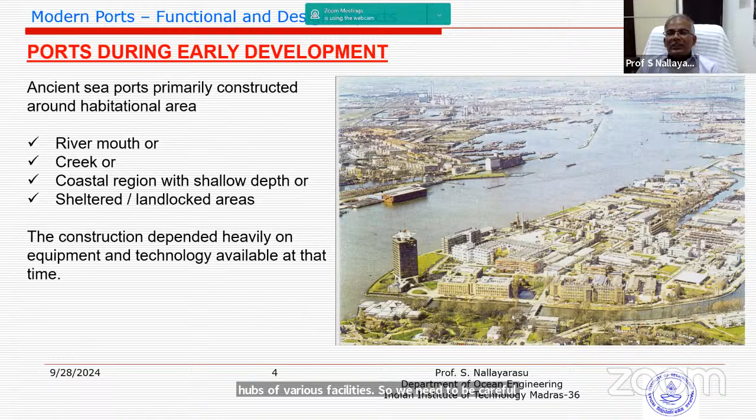Typically, if you see this picture from an old textbook, even now after hundreds of years, the British constructed ports or berthing facilities made of various materials. Even today we can see old ports with stone masonry still operating after 100 years. You will see this in Mumbai port, Calcutta port, and various old ports where stone masonry was used as one of the materials. Of course, today we don't need that because we have better materials than what they used before.

Timber and other composite materials, mixed and matched, were used in early days. But with the technology available then, they were able to develop ports for a reasonable smaller water depth of 5 to 10 meters, that's the kind of range. Today we have more than 20 meters of depth available for docking the largest vessels.

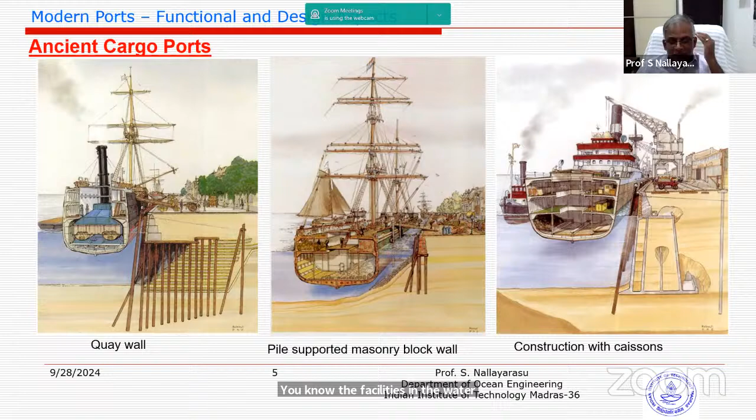In fact, I was involved in one project in Mumbai port, the first in the country with 20-meter dredge depth for docking large crude carriers. So today we have all the technology to construct facilities in deep water, or maybe we don't call them deep water, but at least more than 10 meters.

I'll go through the restrictions in early trade times of the 50s and 60s, where channels really played a major part in deciding what kind of port, with respect to vessel size and draft required. This played a major role especially in the Suez Canal and Panama Canal, where ship construction and trading really depended on what kind of ships could ply through. Of course, one has free travel around the globe, but these channels really play a major role.

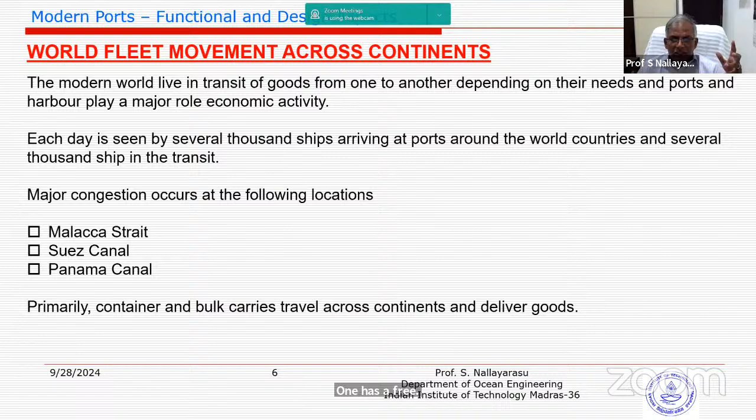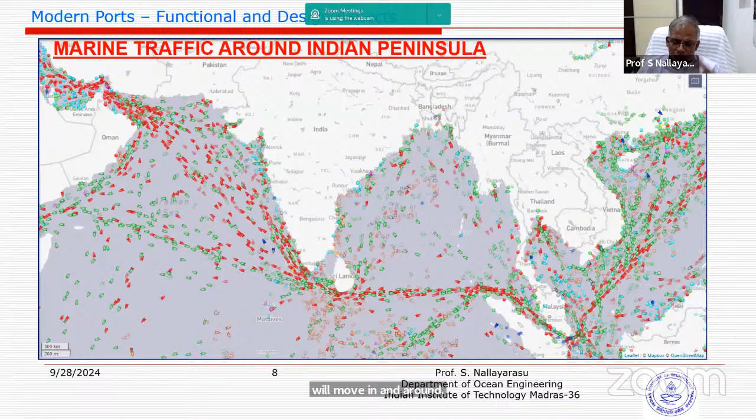I'll quickly go on to the development of a port, where we look at several parameters. One is location - very important that the trade must survive and sustain - and also the volume and type of cargo, which is essential for the development of any port. The type of cargo will decide what type of vessels, what kind of water depth, and so on are needed.

In some recent cases I've come across, the selection of site also has to be linked to the design life, because the perennial effects of environmental considerations at that location make it difficult to design, due to the sea conditions.

And of course, what you see on the right-hand side is the business case, where you have to consider various aspects - connectivity, siltation, dredging, capital cost, operating cost, maintenance cost. These are part and parcel of the decision maker's considerations. Having decided on a berth, you have to weigh all these aspects, because ultimately it's about what you spend versus what you get. The financial calculation finally decides whether any port development will go through or not.

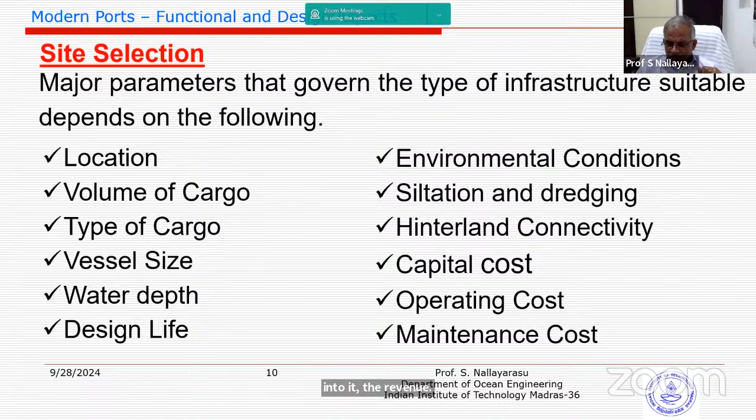Something we must do is this kind of calculation, which we call the financial assessment or techno-economic assessment. Specifically, the revenue and return, which is most critical in any business, and in this business also very important.

The cargo types, typically, if you look at any country, we have goods, and goods can be classified into hazardous and clean. Also, passenger service has become a very much essential part of the transport now.

If you look at some countries in Europe, they prefer water transport compared to land transport. I recently visited Europe, and you will see that the number of passenger ships plying into inland waterways have considerably increased, giving us a very good opportunity to travel across without having to take a train or a flight.

If you classify the trade into multi or international trade, it primarily consists of POL products and containers, and also coal and iron ore, plus or minus happening in the last two decades, but reasonably in an oscillatory mode. So you will see that the share of the trade makes some sense as to what type of port is to be built or considered while planning.

We will have to decide what type of equipment and how we efficiently do it, especially with respect to cargo transfer, location of port, and environmental considerations.

Because some vessels, for example container vessels, will require a lesser sea state, since during cargo transfer of containers from land to ship to land, you need control of motion, which is one of the important parameters. Many times people make the mistake of thinking a container can be lifted off anytime, but very controlled motions are required for container vessels. Otherwise, picking a container from a ship becomes a big challenge.

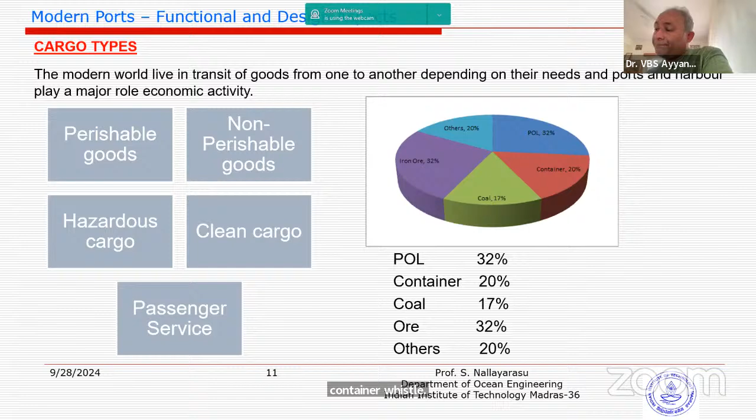Globally, vessels have been built in various sizes since the early 40s and 50s for commercial trade. Since I was practicing, I remember when I did the first jetty in Singapore, we were designing for a 300-meter vessel, 320 meters or so. Today, even 400-meter vessels are operating for container transport, with 24,000 TEU container vessels reaching that kind of length. So the growth of vessel sizes is becoming much more important, because with larger transportation, the efficiency of the system becomes better.

Per-ton fuel efficiency becomes very essential today, because of the greenhouse effect as well as environmental considerations, transporting with too many small vessels is not going to work out.

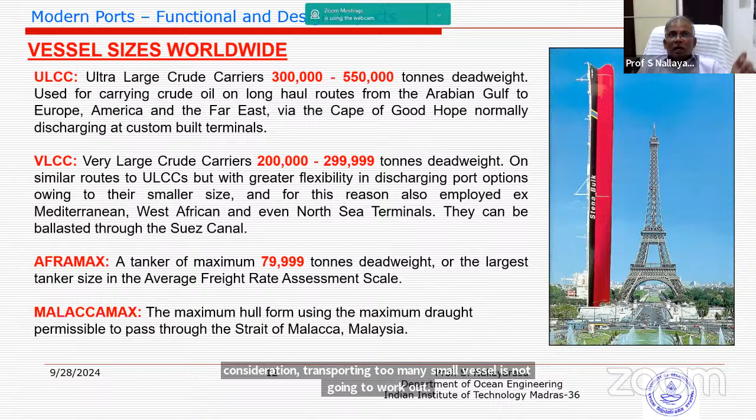That's where ports are also gearing up for bigger transformation. Older ports are getting upgraded, and new ports are designed for the future. In fact, in one of the projects we were working on, the port itself is called the port of tomorrow, meaning we need to think about what will happen over the next 10 to 20 years and have provision for that, especially in terms of ship design and development.

We need to consider what will happen after 10 years; we should not end up having to go and modernize the port again. So that's where we need to think carefully.

On many occasions we hear about this particular aspect of design life, and I would really like to mention here how important it is to think about what we are planning to invest, because the design life, selection of material, and construction technique are going to be different if the design life is longer or shorter. In the design engineer's mind, the longer it is, the exposure is higher, and the larger the exposure, the bigger the design events become, especially natural events.

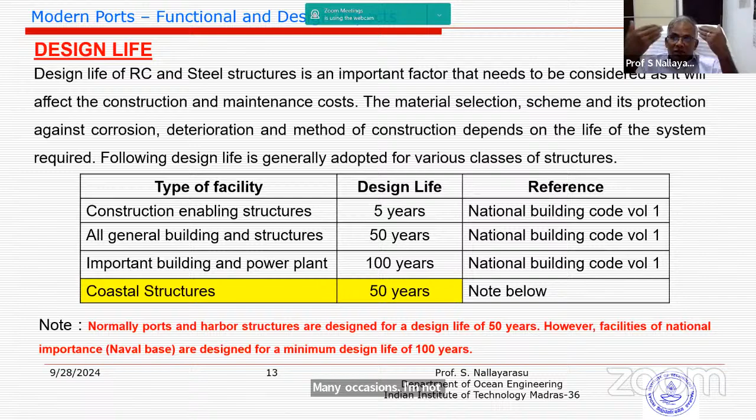Like storms, seismic events, and consideration of others like tsunamis and related natural disasters. So you will see that the longer the duration of life required for your system, the higher the magnitude of design events you'll have to consider, which on many occasions I don't see engineers linking together. They simply go for a standard process of design, which is not correct. That's where we need to link something called the encounter probability.

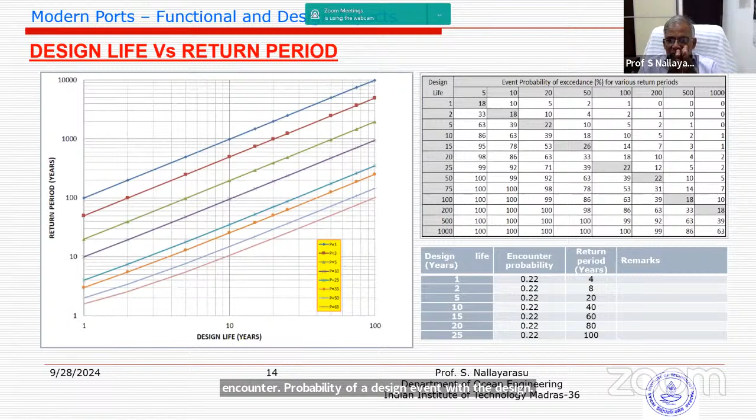The encounter probability of a design event with the design life, which I used to mention about the exposure period, by an example of walking across a street. Normally, how many times you walk across a road will tell you how much exposure you are against an accident crossing by a road vehicle.

If it's one time or few times, maybe less. So that's where this encounter probability is a relationship, mathematically, between the longer period of life and the return period of an event, which we normally use to connect between these. Most of the codes and standards around the world give recommendations.

But even today, we are using an encounter probability of typically 20 to 30%. Whereas in modern times, some of the projects I'm involved in are going towards 5% exceedance probability, which means the return period or recurrence interval from 100 years, we're supposed to be moving towards 1000 years or 500 years. That means the design event is going to be slightly longer, meaning the magnitude of the event is higher.

For example, design wave height, or design storm wind, or a seismic condition, or even tsunami or other cases will have to be taken accordingly, because 20 to 30% encounter probability means this event is surely going to happen, which is something no one is willing to take that risk today. Most European codes have already transformed to 5% exceedance probability, whereas our IS code is still in and around 39%, which is giving us a bit of worry, I would say.

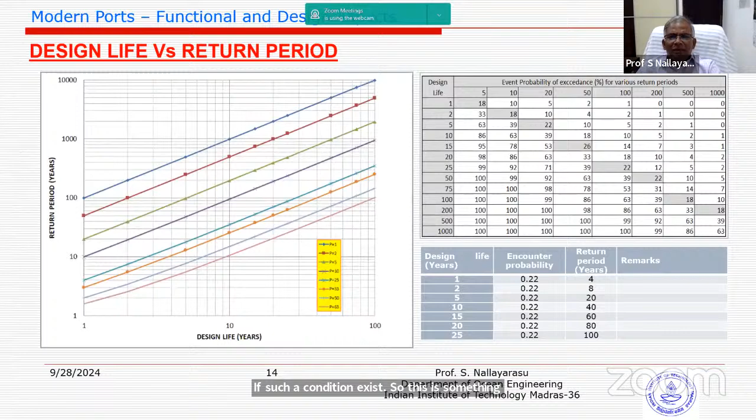Services like ports and airports can't afford to have roofs ripped off; it's very much essential to keep them intact even if such a condition exists. So this is something we take into account in recent times: selecting the return period of a particular event is very important, very carefully, when selecting the design event.

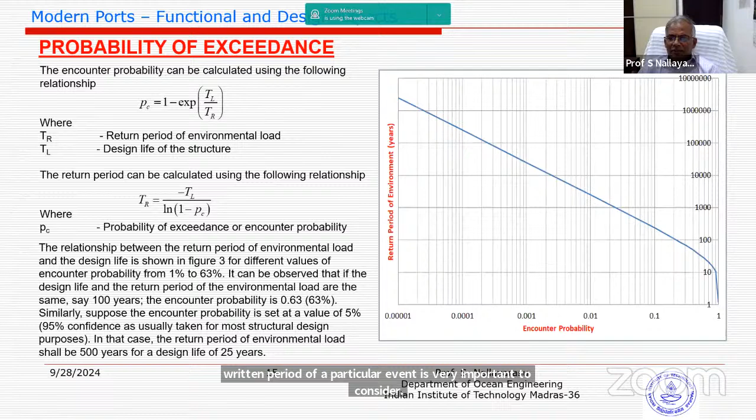I'll just quickly go on to modern ports. I think I have a little limited time, but of course I will try to cover up as much as possible.

Ports as a development for transfer of cargo and goods and services - you will see that natural harbor was one of the primary ideas, that in ancient times people selected a location where there is shelter almost all around the year, where they do nothing but basically build a transfer structure where we can berth the ship and have transfer of cargo. But of course, connecting to reasonably good highways for evacuating cargo - that is basically highways, railways, and so on - and also area for development of stacking yards, storage, as well as the transfer space.

And of course, you may want additional protection - if it is in a river, there will be considerable flow which will start causing movement of ships, which may not be very good for unloading or loading time. So you may have to construct protection, and that's the sheltering effect from wave and current. If it's in the open sea, we call it a breakwater. But if it's within natural rivers or creeks, then it's just basically a bund wall.

Every one of them has got a specialization because of a different location associated with it, and each one of them is a different scenario. One is close to the city, the other one is slightly far away. One of them is very close to open sea. But you will see that it's a cluster of facilities for transfer of cargo and also storage, evacuation. Some of them are import-export cargo. Some of them are transit cargo.

For example, if you look at Singapore, it is 100% transshipment cargo. Very, very little goes inside the country. Everything comes there and then they re-export. That means the business is a very interesting model: if you have a port of modern infrastructure with the largest draft, very well sheltered, the largest ship can come there, offload the containers, offload the cargo, and then they can get distributed to smaller ports around the country, around the world.

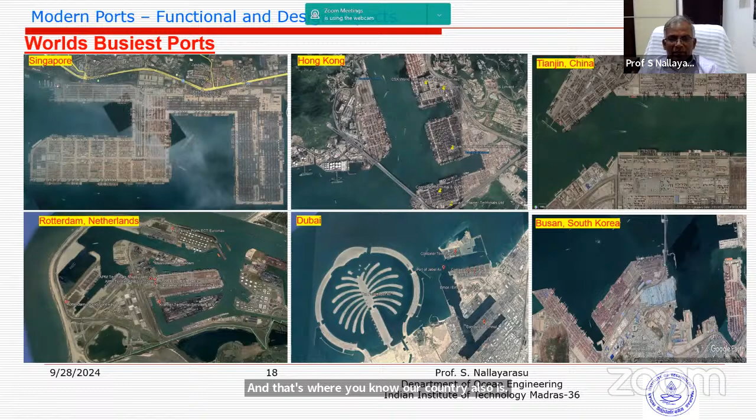And that is basically the hub and spoke model, where you will be able to do a cargo transfer to minor ports or ports with lesser draft. And that's how most of the ports are surviving today, because the internal necessity of import or export is very limited to each country. And that's where our country also is gearing up for development of one or two major ports, which we'll speak about a little later.

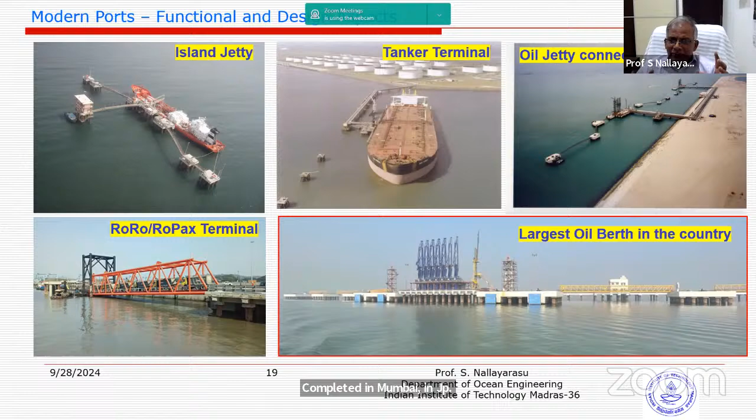Within the Mumbai harbor, there are various kinds of facilities like coastal cargo transfer, transshipment between two places using containers with trucks, and RoPax terminals, which were recently completed in Mumbai in JNPT. And with similar projects elsewhere, you will see that marine construction has actually evolved over a period of time.

We'll just quickly browse through one idea about natural versus artificial harbor. Visakhapatnam, Mumbai: they do have an outer harbor, but the inner harbor does not have any breakwater. So the development of the inner harbor in Vizag is one classical example where they have used the internal water body rather than going out. But of course, during expansion, we start going out: outer harbor 1, outer harbor 2, and so on.

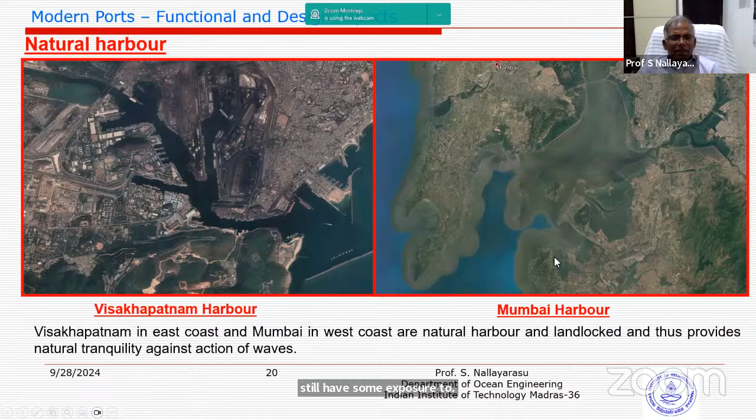Similarly, if you look at the whole of Mumbai harbor, including JNPT and Mumbai port, there is no breakwater there. It's completely sheltered, especially the northern part. Of course, the southern part still has some exposure to wind and wave conditions during monsoon, but it's not a great difficulty for larger vessels. Smaller crafts may not be able to operate.

in terms of accumulation of area, where the beautiful Marina Beach south of Chennai port is actually a result of Chennai port projecting outwards, because there is so much longshore transport of sand and sediments happening on the east coast from south to north during the southwest and northeast monsoon, which you can see physically there, because we are obstructing the natural phenomena.

In fact, in recent times, environmental clearance is becoming much more difficult if you have a shore-connected breakwater. In many cases we now go with a breakwater that is not shore-connected, because this is the result of what we see: the densely populated city is getting eroded on the northern side. Of course, we have remedies now, but do we need to do this?

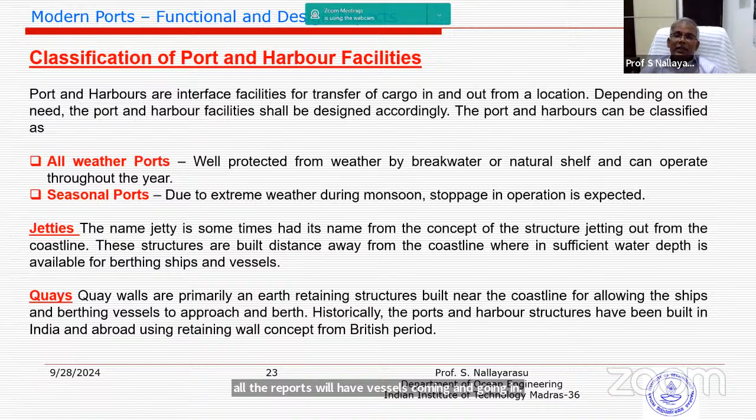Whereas all-weather ports will have vessels coming and going throughout the year, except maybe during storm conditions or cyclonic conditions. And that's where you will have to look at your port development, including the breakwater, which is very essential. So a port entrance area for maneuvering the ships, and a basin and shelter against waves for protection during operation, and of course connecting through rail and road.

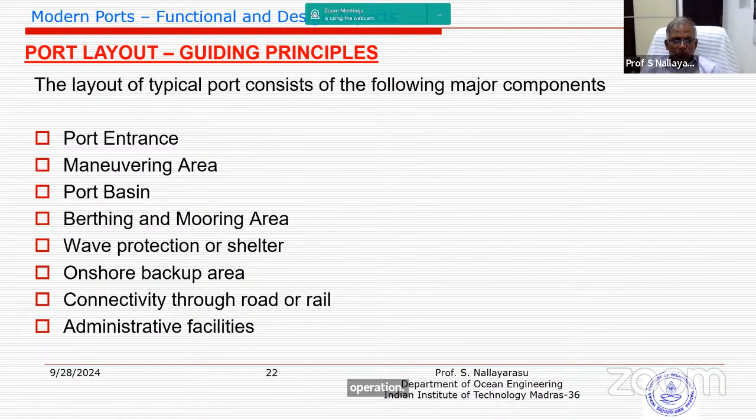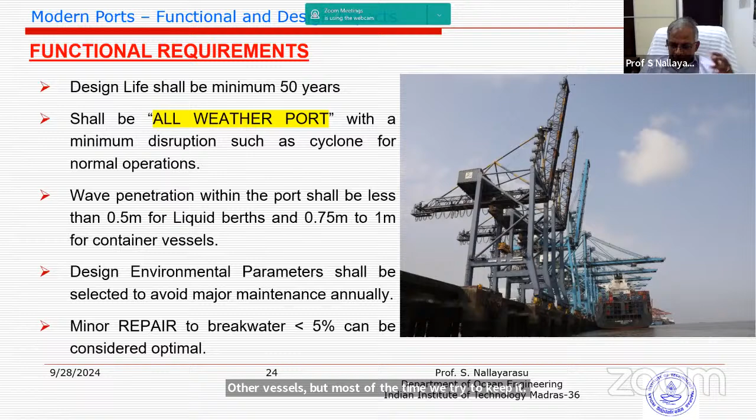So typically, if you look at an all-weather port, design life should be selected at least minimum 50 years, and the waves inside should be restricted to less than half a meter. Of course, slightly higher if you look at other vessels, but most of the time we try to keep it to half a meter. With 1 meter, container vessels, sometimes large vessels can hold on, but smaller vessels may not.

And then, typically, what is the shelter or harbor? Harboring is nothing but trying to give protection against the environmental conditions from natural waves and current. Typically, of course, wind you can't protect much. So we will have to design the ports to limit the wind conditions under which the operation can actually take place, or we will have to shut down in cases of very high wind during cyclonic activity.

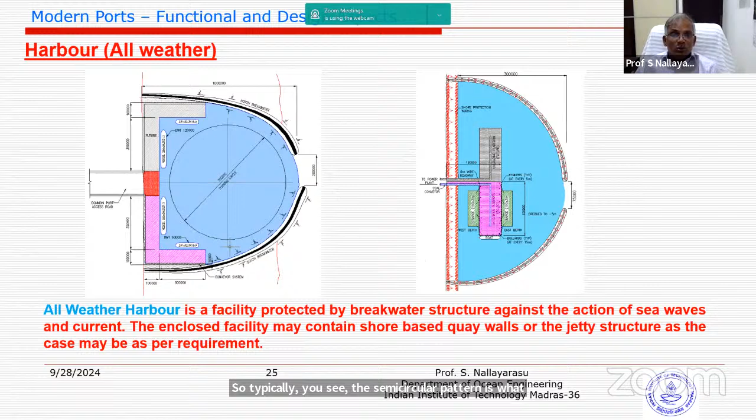So typically, you see the semicircular pattern is what is adopted by designers, but not all the time this will happen, because depending on the coastal area, you may actually develop according to what is really in your hand. So you see the variety of patterns you can develop. The middle one I have just tried to show that you can also build the harbor within the landmass.

In fact, Gopalpur port was developed on the basis of this pattern initially, but then it was not working out because of large excavation. Then finally it went to the old model of trying to construct a breakwater outside. So you will find plenty of choices, but then finally it comes to decision making. We need to look at the aspect of environmental consideration and the cost.

Now, if you look at these models, what we need is a sufficient area depending on what size of vessel. Now, if you look at a VLCC of 300 to 500 meters length, the ship has to come and maneuver, berth, deberth, which means you need to have enough turning circle.

And I think most of the naval architects will understand how difficult it is to maneuver a ship of large length. 300 meters, 400 meters is not going to be like our small car where we can turn in any direction. And that's going to be one of the areas where we need to have sufficient space; 3 to 4 times, 5 times the ship length will be the radius that we require to turn around.

And of course, every port will have that area, and then there will be difficulties in trying to actually bring the ship to the berth, because you can't have 100% turning near the berth itself, which will be controlled by tugs. Typically, we do this kind of assessment using a maneuverability study. There are several techniques, manual or track plot or simulations, 2D, 3D, desktop, all kinds of studies we make for the entry and exit of the ship.

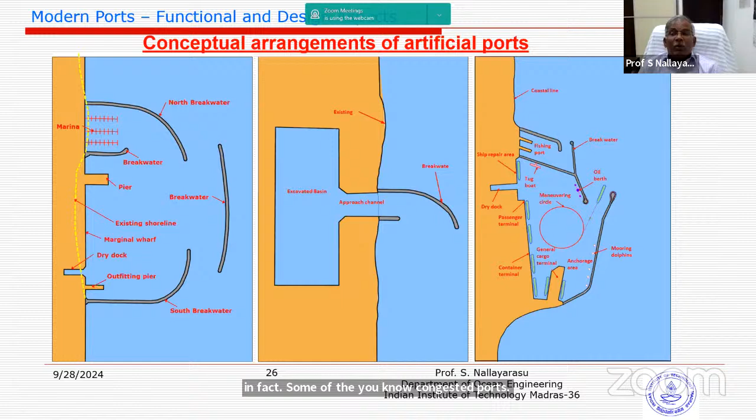In fact, in some of the ports, similar to any other transport hub on land, you can see the entrance and exit are different compared to a single entrance to the port. In many cases, a very narrow channel becomes accident prone. In fact, in some of the congested ports, we do experience collisions in recent times, which are very much avoidable by having, of course, separate entry and exit.

So the typical port has access from one end, then exit on the other side, having the berthing area fully sheltered on both sides, sea side and land side. You see the logic. The larger water depth can be had on the sea side of the berths. Smaller water depth can be taken here, and a kind of arrangement division into cargo. One side is clean cargo, the other side is hazardous cargo, one side is passenger.

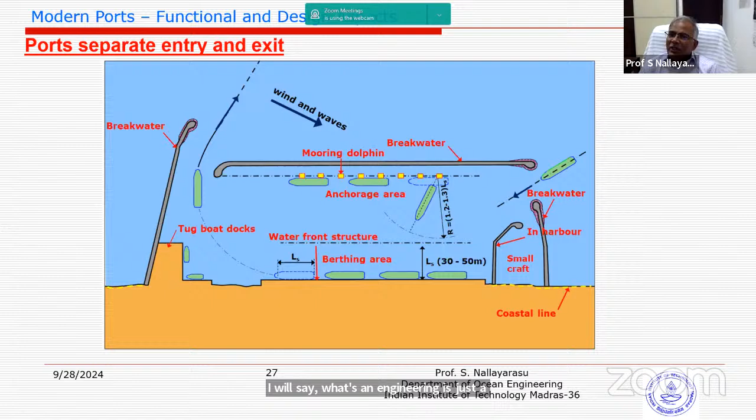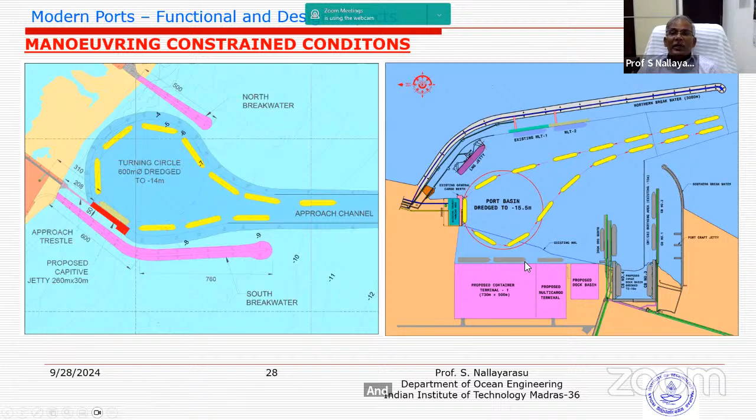And the left side was one of the greenfield ports, done, I think, in one of the countries in Africa where we were trying to develop a new one. So you will see that in every one of them, we need to assess the width of the approach channel, making sure that consideration for wind and crosswind effects when the ship is coming in, berthing and deberthing, and going out without having any implications on other existing facilities is very important. So the maneuverability study is part and parcel of any port development.

Normally the starting point is simulation, but later on we go on to a 3D simulator to make sure that the captain can berth and deberth, and what is the necessity of tugs. In every project we try to establish the capacity required for tugs and what kind of maneuverable situations, high wind, should be tried. In fact, even with this modern technology, even now we do have drifting of ships hitting

this berth. In fact, 3-4 years back, in one accident at one of the ports in Mumbai, the container vessel went straight head on, 90 degrees to the berth line, and hit and punctured the structure 3 meters inside. And I was looking at the remedial. It was such a high impact that it was able to rupture through a 2-meter depth beam and in fact a 0.5 meter slab, 3 meters into it.

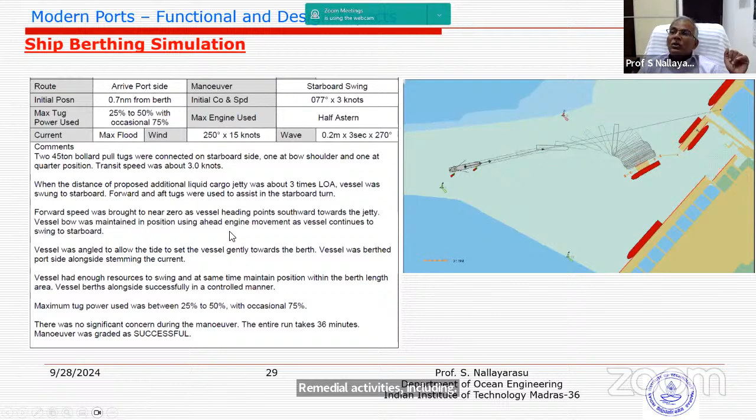So that is the kind of situation we will get in case of uncontrolled movement due to wind. Of course mechanical failure is something different, but environmental consideration can always be prevented by doing necessary remedial activities, including high capacity bollard pull tugs, which can control the movement of the ships near the berthing structures, which is nowadays becoming very essential.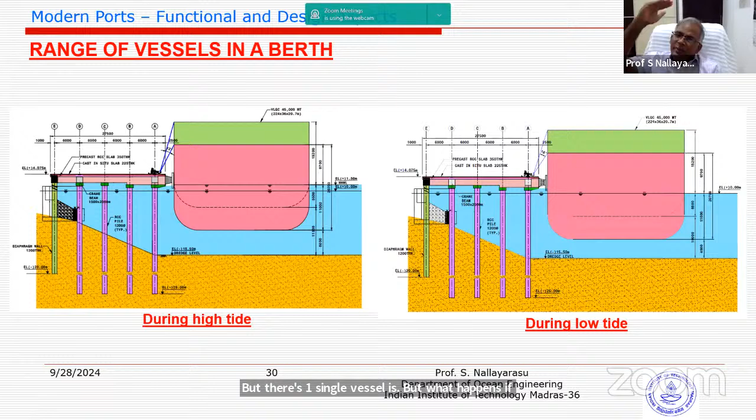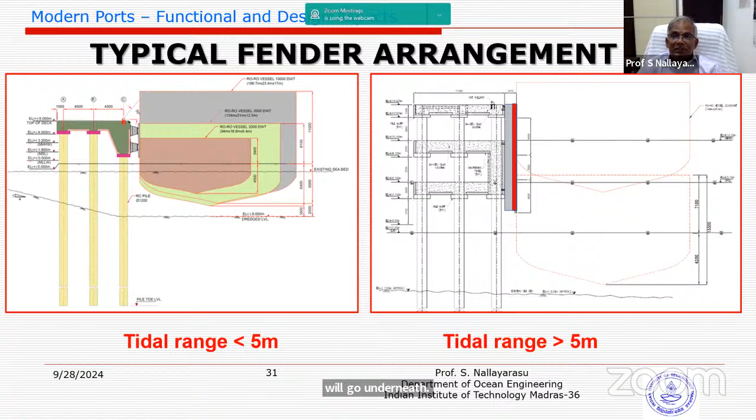The other aspect that needs to be thought about, in fact very important, is the consideration for tidal range, because with vessels becoming too big, the range will be a potential problem. In fact, if you see here, a single fendering arrangement for berthing one single vessel is easy. But what happens if the vessels are smaller in nature and the tidal range is bigger? Then we'll end up putting a fendering system to accommodate all types of vessels, all types of tidal range. So we have to come up with such kinds of ideas. Otherwise, what will happen? The ships will go underneath, and it may damage the berth or jetty, which is becoming very important today.

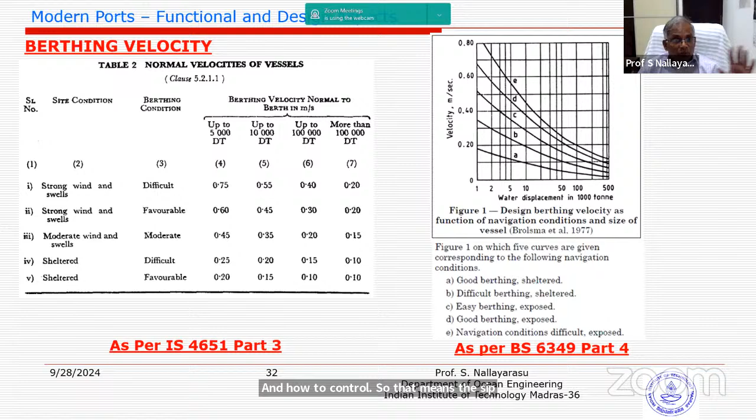Also, the control of velocity, which I think most naval architects will understand: a higher velocity vessel moving towards the structure is not advisable because it may damage it. So you see, less than half a meter per second is the kind of velocity that we normally permit when they approach. But less than 10 centimeters, 20 centimeters per second is the kind of velocity at which you can make the first point of contact. And how to control it? That means the ship has to have assistance from tugboats, probably with the main engine off, trying to bring it closer. But even otherwise, we also have a system which we were working on.

In fact, 25 years back, in one of the projects in Singapore, we did this particular interesting technology. Basically 2 laser beams are pointed towards the ship, and the reflected laser is received by a laser meter at the jetty, and a large display with green, yellow, and red signals will display the velocity and give an alarm. So when the vessel is trying to come closer, if the velocity is higher, the captain can either do some remedial or go back.

So this is what we call a berthing aid system. Today they call it a velocity of approach system. But I remember it was one of the first ones, in Singapore itself, in 2000. We started with this because accidents did happen at that time, in a very congested area. So this kind of latest technology could be utilized.

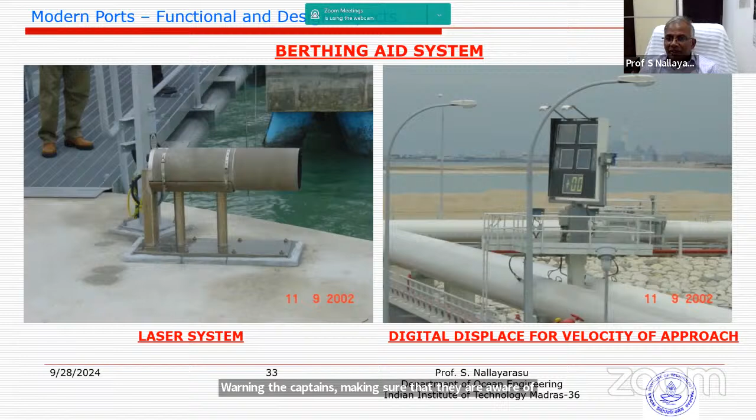In fact, of the ports operating in our country, I don't think any of them are using it, except the one I recently recommended in JNPT, a container berth, where I recommended that this must be installed because they were trying to do multiple berthing of 2 vessels at one single berth in a single line. So this is one of the areas where restricting the movement of vessels and warning the captains, making sure they are aware of what speed they are approaching at to avoid accidents, is very interesting, and not very expensive.

And of course, olden days bollards may not work now because we need to know what kind of loads go onto the mooring ropes, onto the bitts and bollards on the ship, onto the cargo transfer. So the complete monitoring system with fully instrumented mooring hooks, as we call it, is a complete display of everything that is happening with vessel movement, vessel trim, roll and pitch, as well as the loads on the mooring line itself. It can be displayed on a panel in the control room, where we can actually see everything before taking a necessary action, either to remove the vessel or disengage the vessel, or disengaging remotely.

In case of fire, if we are not able to go to the ship, or if we are not able to communicate, from a remote location we can release the ship, and the ship captain can take action to release, because the captain cannot come down here. So when he wants to take the vessel away from the berth because there is a fire on this jetty, then of course we need to have this so-called remote release system.

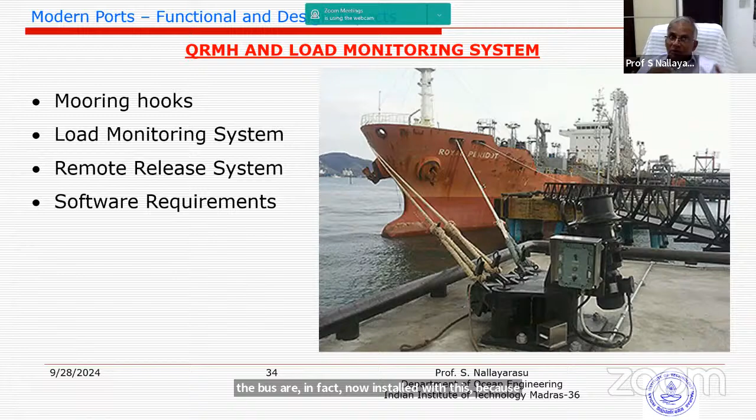It is now becoming mandatory. Basically, the PESO guidelines and the industry requirements say that for every hazardous cargo like oil and gas, we need to have this kind of system involved. Most of the berths are in fact now installed with this, because otherwise the government guidelines do not give you permission to operate. So that's one mandatory system that we look for nowadays.

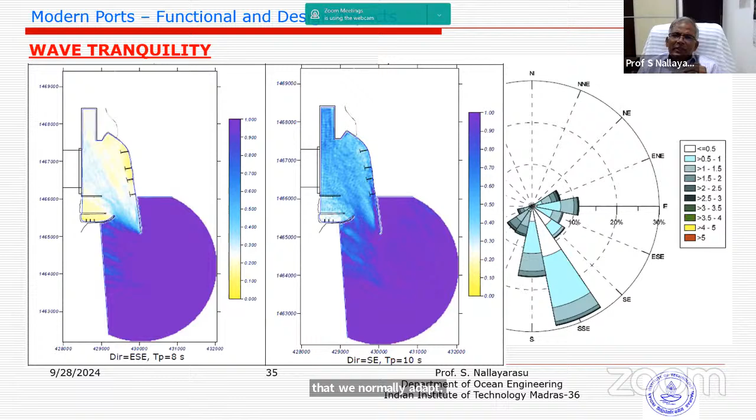This is where ocean engineers are involved. We need to come up with this study to make sure that the penetrating waves inside are limited in height. And of course, less than half a meter is the kind of norm that we normally adopt. In some cases we go up to 0.75 meter or 1 meter in case of large vessels.

The last topic is coastal shipping. Not the last topic, the second topic. I hope, Dr. Iyengar, I have another 10 minutes. Yes, sir. The session chair can decide on the times.

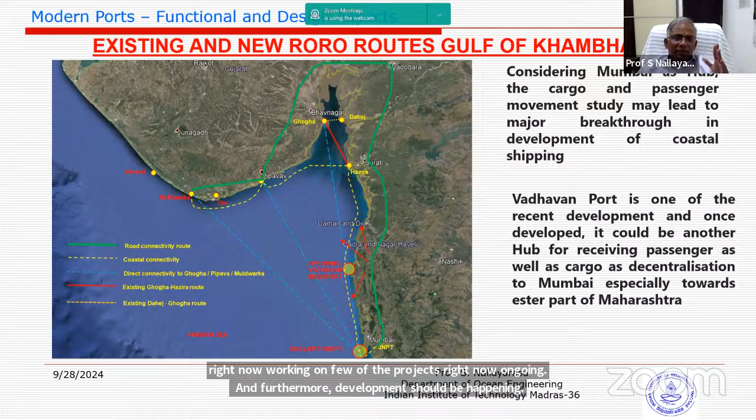Basically, development of cargo transfer by means of ro-ro pads, especially at larger ports like Mumbai, which will have large containers coming in. Distribution by land versus distribution by other means, railways, or by ships themselves with the trucks going in, will be one of the very interesting aspects. The time and the cost saving: you see the green color versus the sea route, a lot of savings. I'm right now working on a few of the projects ongoing, and further development should be happening in times to come. I think by 2030 we should have a number of such facilities. Transfer of cargoes would be by RoPax.

Similarly, if you look at the Gulf of Kutch, we also have a lot of plans to develop several inland waterways and coastal shipping areas where avoidance of such large roadway or land routes is to be taken into account. For such facilities, the facility development depends on the tidal range. So in that particular report, we were classifying the whole country into 3 or 4 important zones. And of course, the most critical one is the western part of the country, where the tidal range is very high. The eastern part is not so difficult because the tidal range is much less, depending on the coastal exposure.

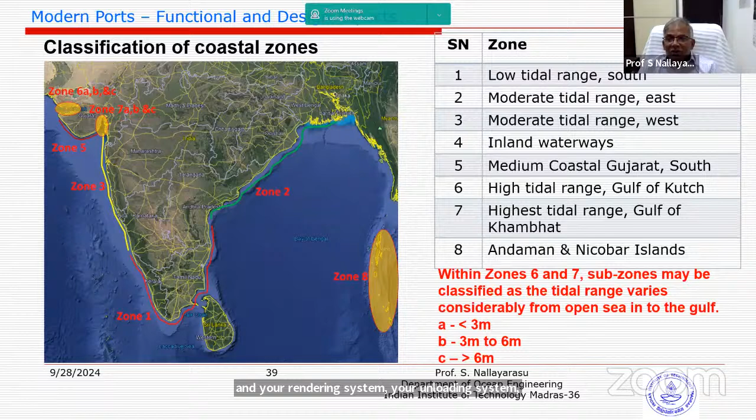So you will see that in zones 5, 6 and 7 the tidal range is typically from 8 to 10 meters, and managing a port with an 8 to 10 meter tidal change every cycle is really going to be a very tough job, because the ships will go through that. If you are unloading for 2 hours, it is okay. But if you are unloading for 2 days, the ship would go up and down several times in the tidal cycle. And your fendering system, your unloading system, your other facilities should be capable of taking into account the tidal range, which is one of the biggest problems.

So we need to decide upon what type of facilities will be suitable: fixed type, floating type or semi-floating type. In the report we elaborated, but I won't go into much detail. The tidal range is one of the important aspects of design of such a facility.

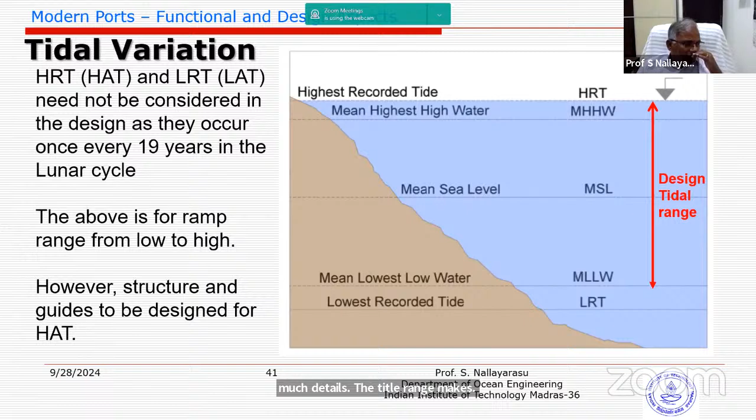So for example, one of the facilities which we have built uses a floating pontoon, and the pontoon provides the interface with the ship, with facilities for transfer of cargo and a bridge span linking the floating facility and the fixed facility, which is what we call the RoPax or RoRo facility, where you will be able to transfer cargo all the time without having to worry what the tide is, because the interface is kept constant, because the floating structure itself is supporting the ship. So the cargo will move through whatever the tidal range is. This is one of the pictures which I think I have shown earlier, which is becoming almost a standard now. Everywhere we are building this.

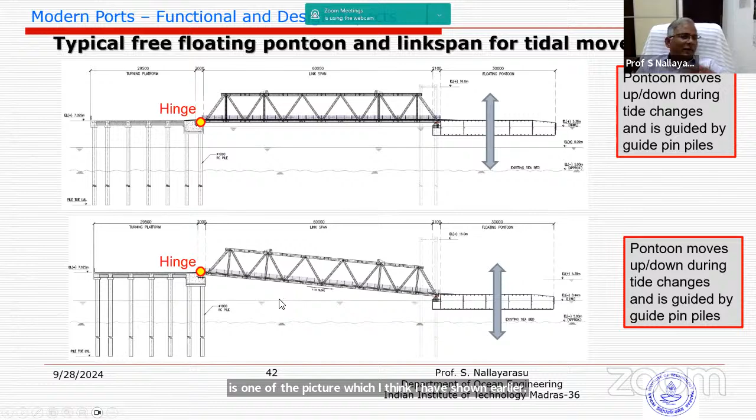So with that, I would move on quickly to the breakwater. I hope I'm okay with another 5-10 minutes. So

Yes. So the breakwater is part and parcel of port development. In early days, when I was a civil engineer working in the company, we used to design smaller breakwaters with rocks, but nowadays they are becoming larger, with deeper water depths and bigger wave heights. So the artificial armor, what you see on the right-hand side, taken from some of the suppliers and vendors, concrete armor units are becoming very essential because we are designing for the largest wave heights and largest water depths. It's becoming very difficult to get bigger size rocks, so we move on to artificial armor units.

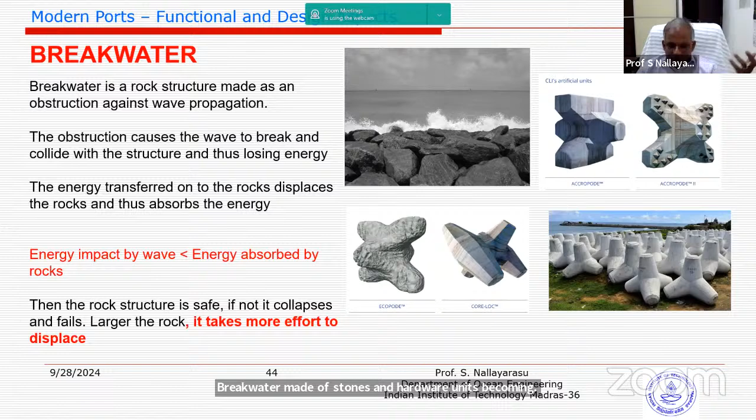So what is a breakwater? A breakwater is a barrier trying to take the energy of waves coming from the sea and do work. That means a deformable structure with the deformation within limits. If you build a rigid structure, the load would have to be transferred to the sea bed by means of the structural design, which is going to become very difficult. If you have to design for breaking wave loads, it's becoming very, very tough. That's where rubble mound structures, breakwaters made of stones and armor units, are becoming very common.

Typically, a breakwater would be something like this, a bund type of structure where the rock is dumped and protected by the armor, the layer of material which takes the energy of the sea waves coming in and impacting on it. That's what we call the armor. Armor can be stone or man-made materials like concrete, of the size required to take the energy. Of course, the inner bund is normally made of rock, not other material like soil, because construction would not be possible. So mostly a typical breakwater will be of this kind.

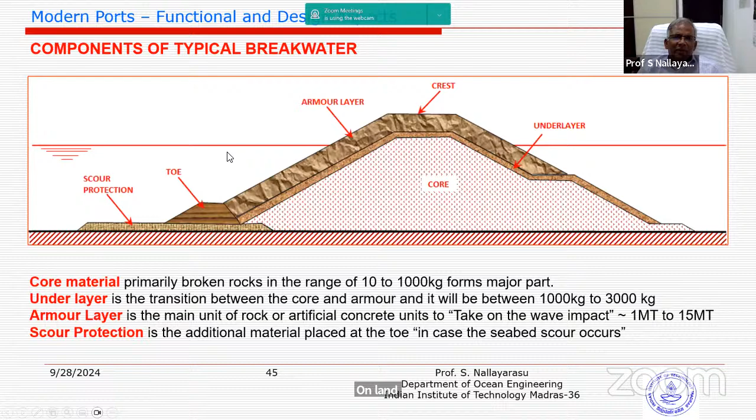Of course, protection near the toe is required in case of damage due to scouring or other slope failure, to protect it on the seaside. On the land side, normally it's not necessary to worry because the waves are smaller anyway. So the most vulnerable area is here, where the waves are interacting with the stones.

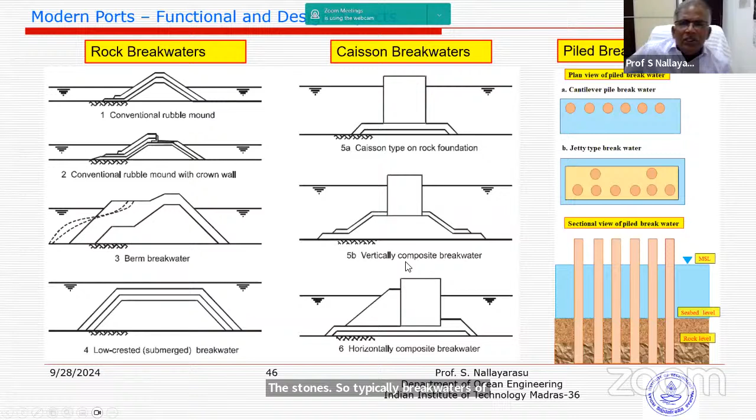So typically, breakwaters of a variety of types have been investigated by researchers and professionals, but still we go with the rubble mound breakwater as cost effective and sustainable, though of course not very good in terms of environmental considerations because you are going to break a big hill. But whatever the construction, we still need construction material, even if you go with other materials. So basically, you have rock breakwaters, and caisson type breakwaters, which are nothing but RCC caissons placed in line, but that is normally not done in many cases. And of course, in recent times a lot of people are studying piled breakwaters and different types of breakwaters, but cost effectiveness and design become really difficult.

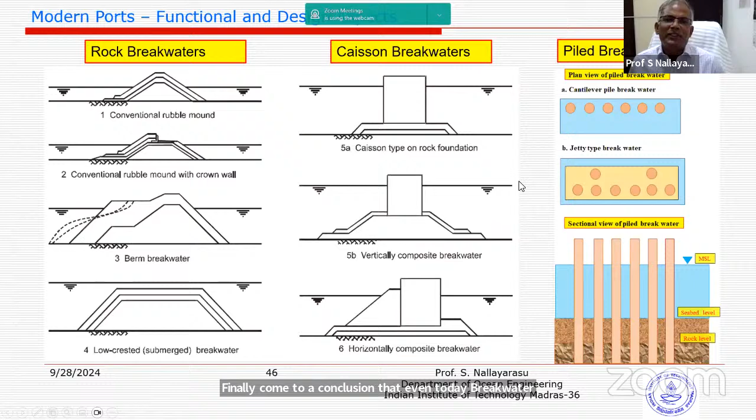So I have done a case study and finally come to a conclusion that even today, rubble mound breakwater will be the best choice given the situation with respect to cost and efficiency. Typically we need to come up with the dimensions, which is a design problem. If you follow certain codes and standards, we can fix the width, slope, stability, selection of rock and selection of thicknesses. Typically, 1 in 1.5 to 1 in 2 is the slope that will be naturally stable using natural materials like rock and armor units.

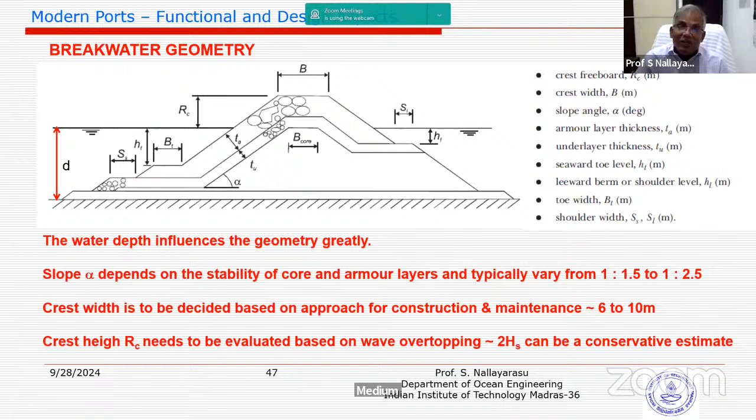So many times we do a lot of trial and error through study, lab experiments, medium scale experiments, and then finally we fix the design because that's going to decide our cost. Basically, failure of the breakwater means failure of the port, because none of the operations within the port can take place. So typically failure can be at the slope, failure can be due to overtopping, or failure can be at the toe. Of course, toe protection can be made substantially stronger, and overtopping is addressed by increasing the height.

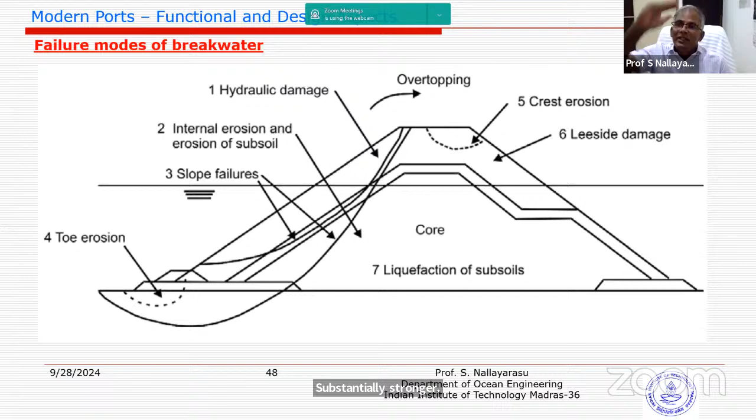Now, if you look at overtopping, we study this in laboratories - in Pune we have our Central Water and Power Research Station, CWPRS, and they've been doing a lot of studies. We also do this kind of measurement at IIT Madras. In recent times, we have developed a laboratory for these kinds of studies. But model study versus real conditions will always have some difference because of scale effects.

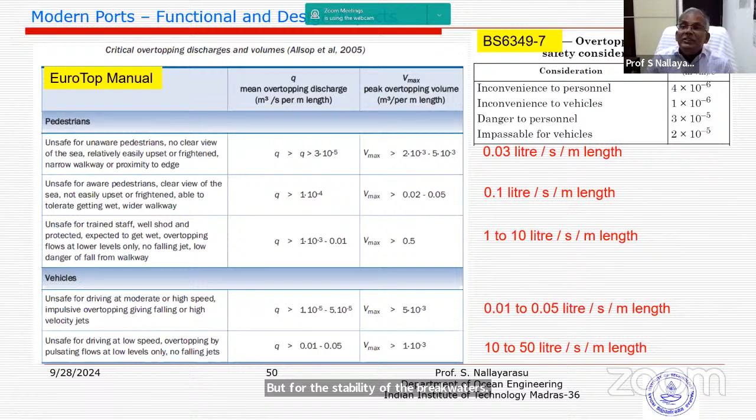So then we rely on both empirical formulas given by several researchers, and basically the guidelines given for limiting water discharge on the port side for various functions like pedestrian safety, vehicle safety. But for the stability of the breakwaters, what is really required isn't really mentioned by these codes and standards, which is what you'll see in some of the pictures I'll give you.

This is one project which was constructed in 2021-22, and I was a passerby, a visitor. I mentioned that the crest height was lower and may have a problem, but nobody believed it would actually happen. Within 3 months' time, it actually happened.

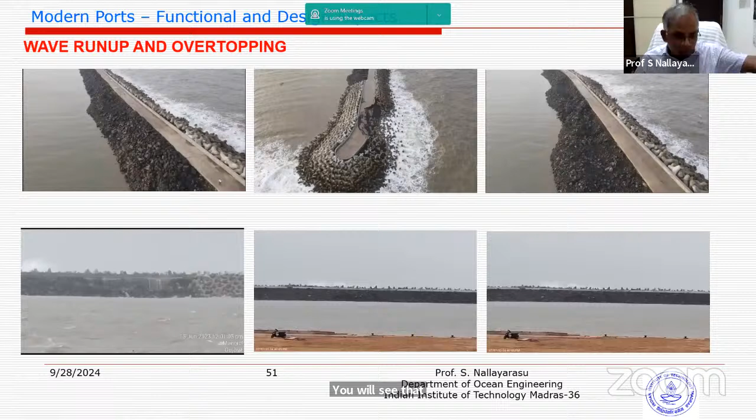So you can see here, waves are surging, waves are breaking, and reasonably a lot of damage was done. In some of the videos, you can see waves from the seaside passing across. You can see at this location it's splashing, which is becoming potentially significant because the height is lower - this is something very, very important to note, that the design is the problem.

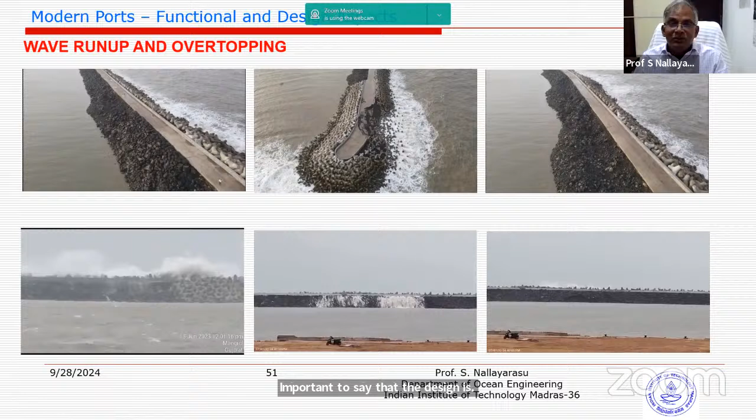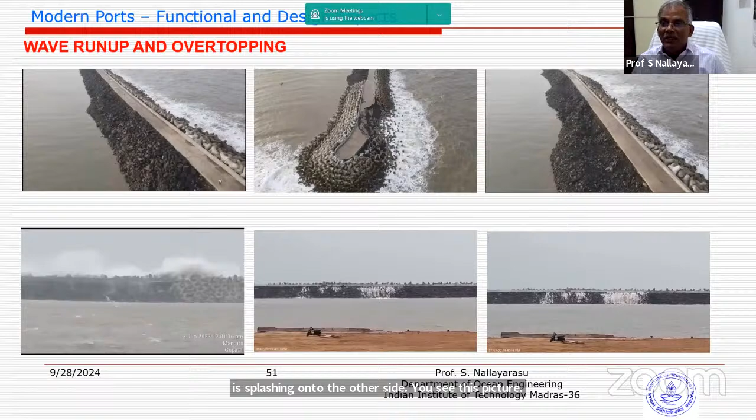We should not have a breakwater designed in such a way that so much water is splashing onto the other side. You can see this picture - this is something we have to think about. That's what we were talking about: what should be the height that makes sure this side is protected, because this side is taking the energy.

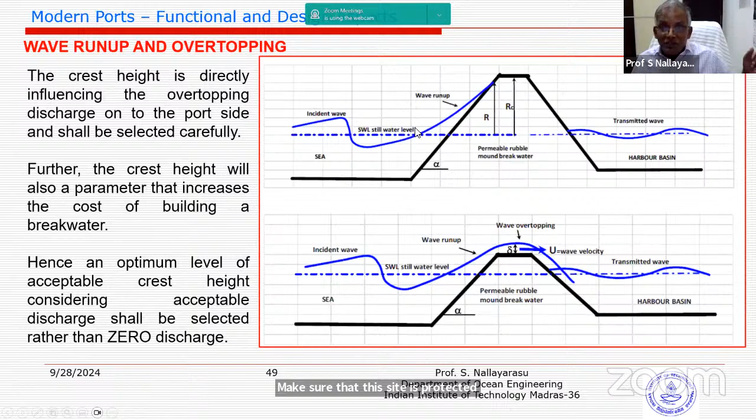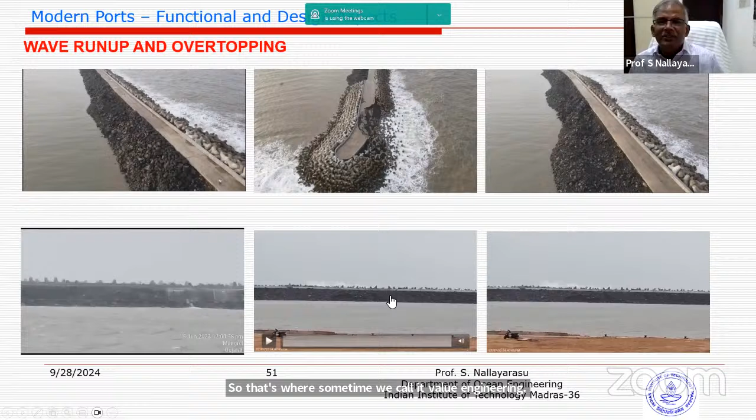Something I want all of you to understand is that in design, there is nothing free. Your brilliance does not come with all necessary protection if you have reduced the height - the reduced height will lead to these kinds of effects. So that's where sometimes we call it value engineering, optimization, fit for purpose. Finally, one of these days it becomes like this, and potentially rebuilding will become double the cost of the project, which is something that happens.

So with that, I think most of the main presentation is over. I'd just like to highlight a quick review of one of the projects we recently planned, designed and completed, which will give us an idea of what goes through a major mega project development - maybe 10 slides, I think. So I will proceed.

So basically, this is one project which has been there for the last 10 to 15 years for development, but slowly now it has picked up pace. It's called Vadhavan Port - you might have heard about it in recent newspapers over the last 6 months to 1 year. The investment is approximately 76,000 crore, and the water depth or dredge depth or draft allows us to bring in vessels of 18 to 18.5 meters, with a large breakwater of 10 kilometers.

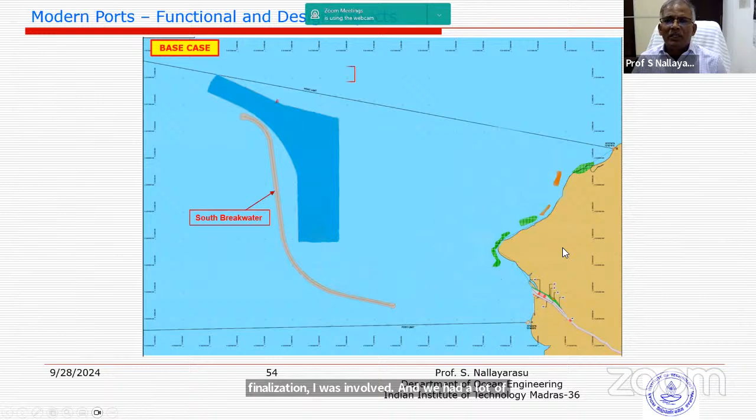The initial plan of constructing a terminal of this kind was there, and during the finalization process I was involved with officials and government authorities. My advice was this will not work, because you would have to transfer cargo containers from the berth to the stacking yard, back and forth 5 kilometers. This is never a design adopted elsewhere in the world.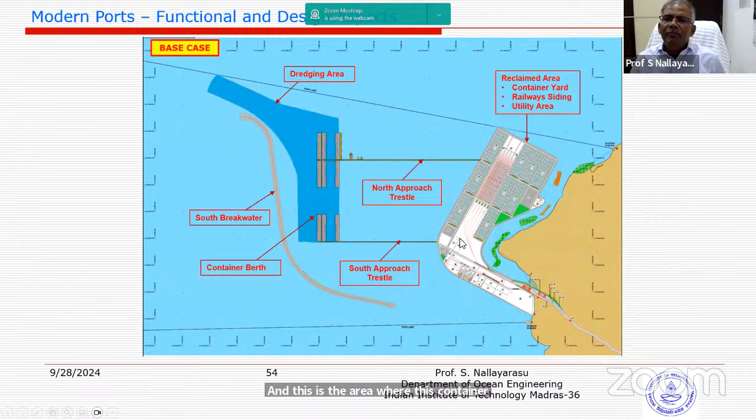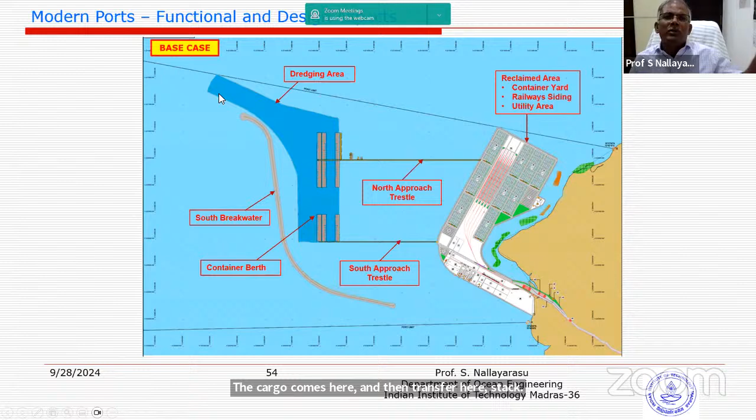This is the area with the container stack yard, railway yard, connecting to road. All necessary requirements were made, except that cargo comes here, transfers here, stacks and moves inland or goes out again, which was the plan.

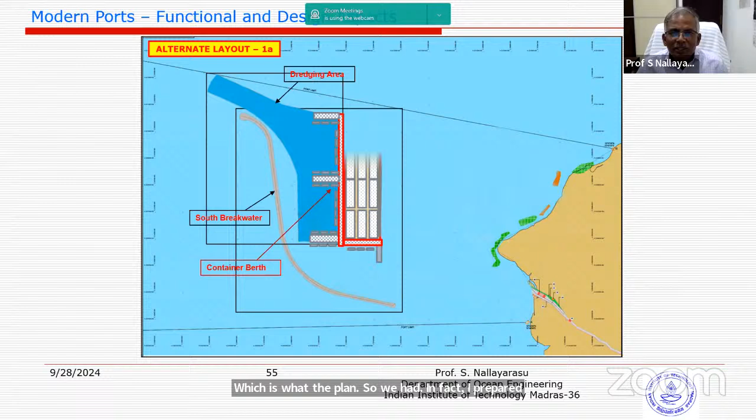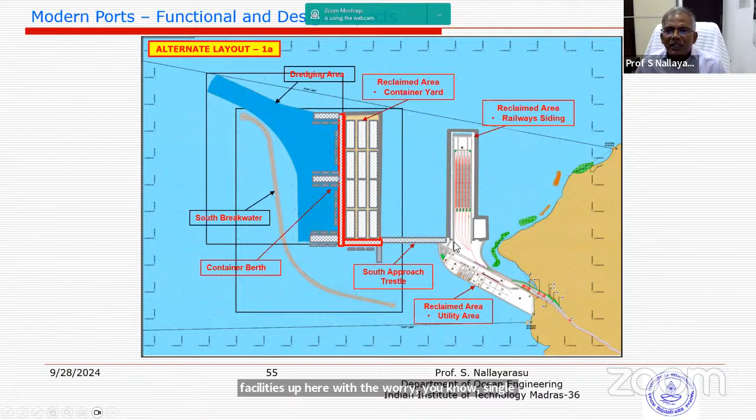We prepared several cases. Case 1A was shifting the container stack yard near the port or berth, limiting container movement to locations specific to the berth, while keeping the railway yard and other facilities with a single link for easy transfer. That was the original plan 1A.

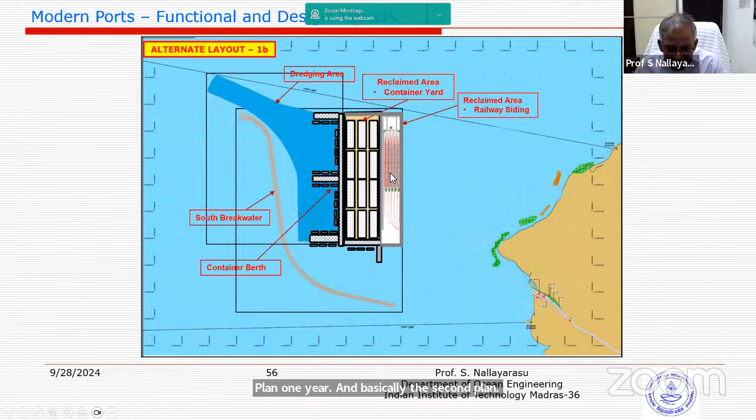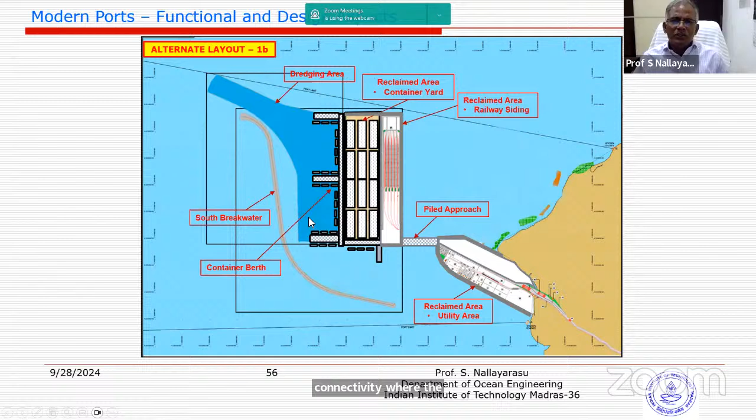The second plan was to shift even the railway and every facility near the port, connecting only by a single connectivity where landside facilities could be located. This was similar to the terminal we've seen in Singapore. There were also sub-ideas of various minor features.

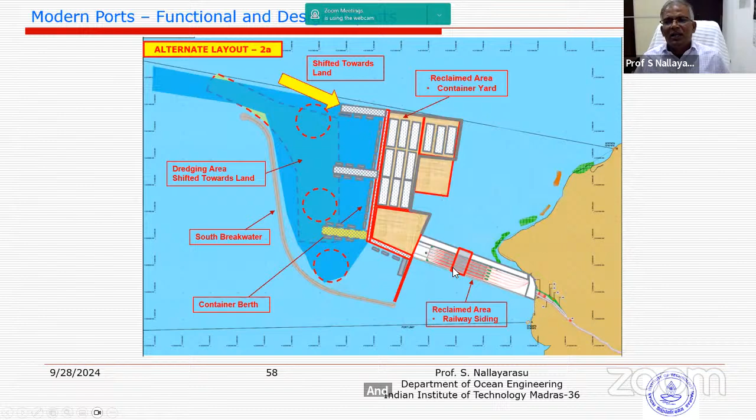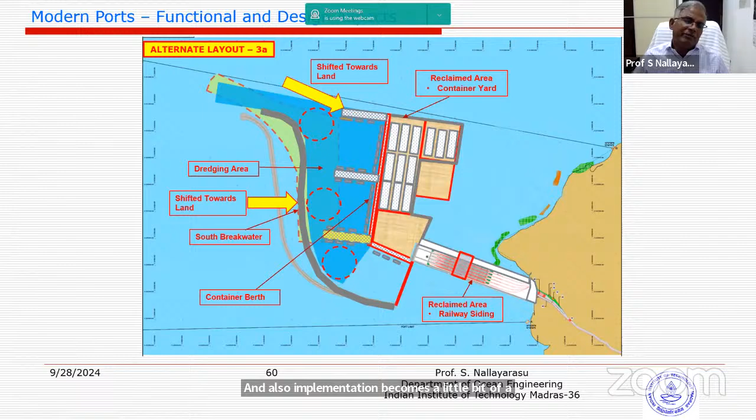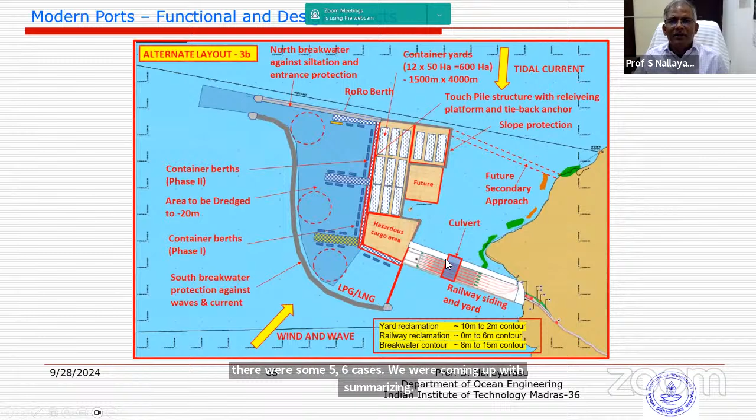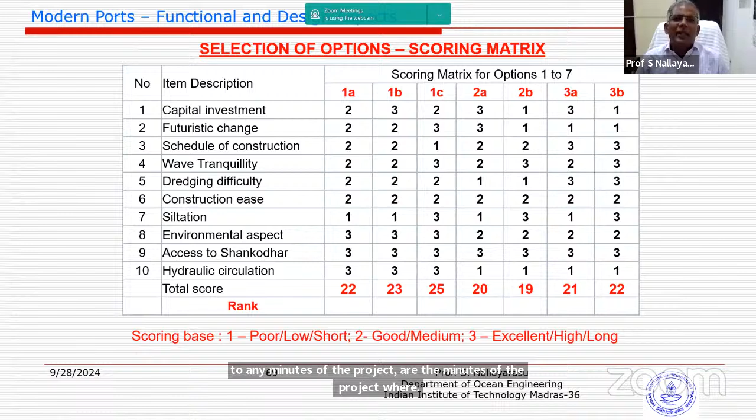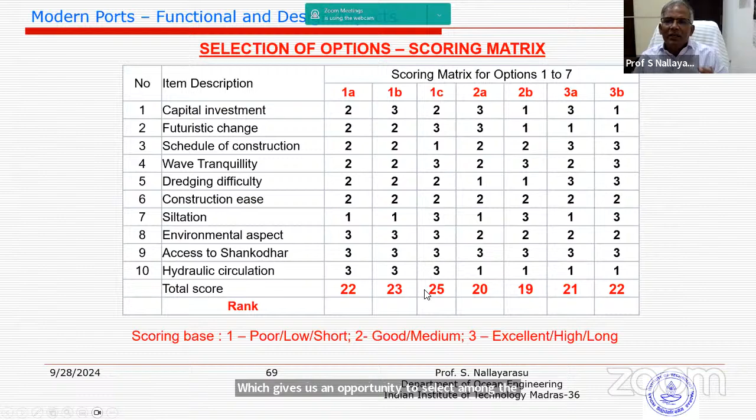Normally in industry we apply this approach, looking at the merits and demerits of the project, putting down value for money - how much it's actually going to give us. This is the matrix of evaluation. Option 1C, where everything moves near the port, got the highest mark among the 7 options studied, so we developed something similar to 1C.

This is what was finally finalized and went for budget approval, cabinet approval, and PIB approval. Finally now the inauguration of the foundation stone has happened.

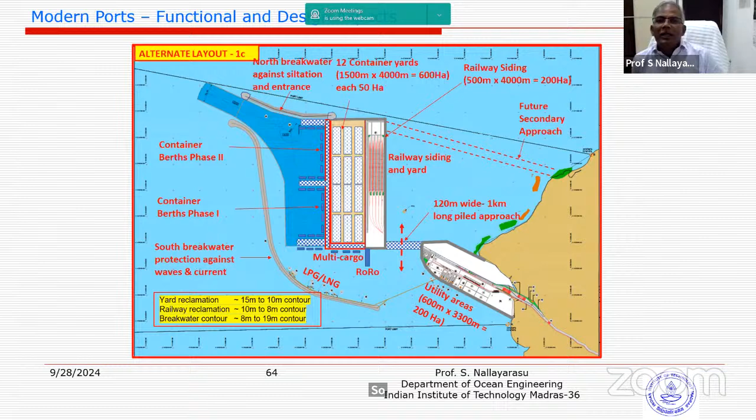This project will be a game changer for us, because ministers and officials talk about this port being equal to the country. Today we handle about 22 million TEU of container cargo, and this single port will be able to handle the same quantity within another 10 years. This will become one of the major hubs serving the region and the country in a mega development of marine transport. I hope the information provided has been useful.

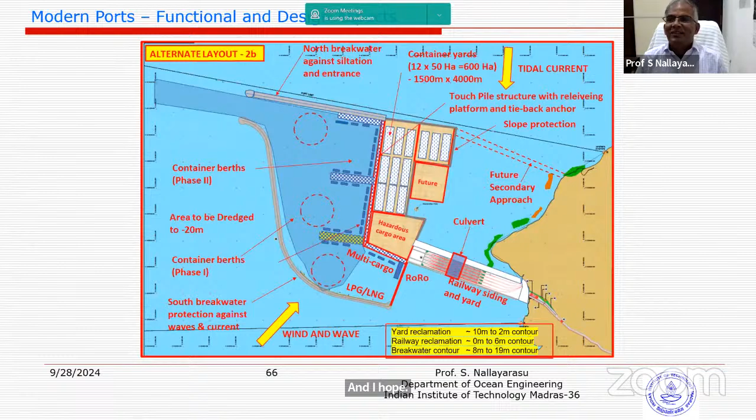That's all, Dr. Iyengar and Professor Misra. Professor Misra, I think your microphone may be on mute. You are muted. I was hoping we should hear Dr. Ghosh first and then go for question and answer. It's an excellent lecture, Dr. Nallayarasu, thank you. May I request Dr. Ghosh to give his address? Dr. Ghosh, your microphone is also on mute, sir. Misra, can you hear me properly? Yes, now we can hear you.